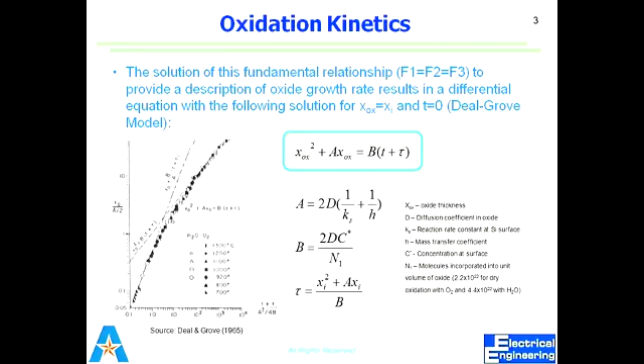So this is linear growth and this is parabolic growth. So it means that Deal-Grove, now you can understand the next two slides. For short oxidation times, now we're talking about this short oxidation, the Deal-Grove relationship reduces to linear form, defined by B over A. This is actually the linear rate constant.

So what will you always be interested in? B and B over A. So this is your linear rate constant, B over A, and this is your parabolic rate constant. So B over A is actually the linear rate constant and B is the parabolic rate constant. So now you have understood why it reduces to linear form.

For short oxidation times, why does Deal-Grove's equation reduce to the linear form? Because we ignore X oxide square. X oxide square, being very small, is ignored, so we get this. And B over A is actually the linear rate constant.

And now the second line, the definition of B over A can be further reduced by the assumption that H is, what was H actually? If you remember that first slide, this H is the constant named as mass transfer constant. Ks is actually the reaction rate constant, and this H is actually the mass transfer coefficient, and reaction rate coefficient Ks.

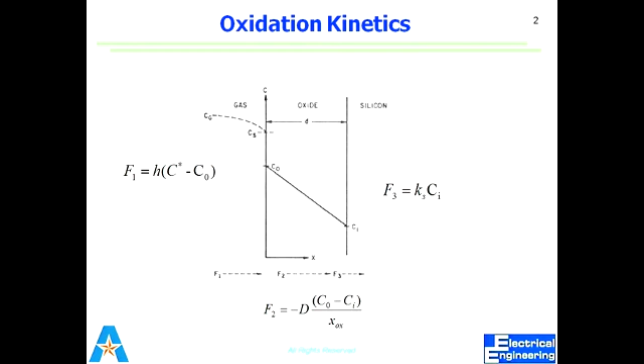Okay, now we were talking about this short time. Anybody who could understand the second line from the discussion? The second line says the definition of B over A, that is the linear rate constant, can be further reduced. Means we can also say that H is very, very large as compared to Ks. Means that the mass transfer coefficient is very high, as compared to all the molecules that get reacted with the silicon.

Yes, now you get to the point, what is the limiting factor here? In this case, as you talked about initially, when there is no oxide, I am talking about the very thin layers. Very thin layer, you can say no oxide. Okay, at the start, it would be a linear increment. The greater the time, the greater the thickness. It would be in the linear region.

Okay, in that case, the mass transfer coefficient means that the gas can be transported from the source to the surface very fast, but the limiting factor is the reaction rate constant. Because there is no resistance to the gas, all the gas is reaching the surface. But the surface has a limited number of silicon molecules; it cannot react with all the gas molecules at one time. So Ks means the reaction rate constant is limiting our oxidation rate. So this process would be called a reaction rate limited process.

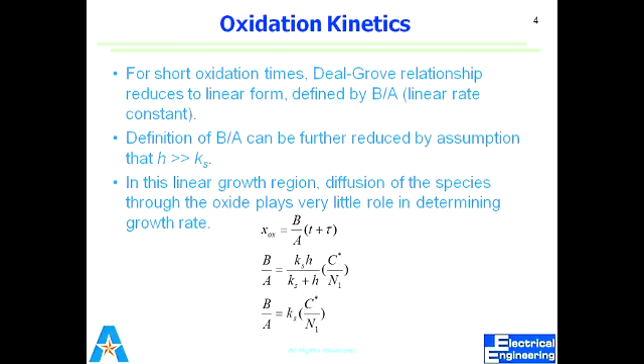Okay, so we have completed the linear region. That is for thin oxide layers. We say this is the linear region, because in this region the oxide growth is linear, and in this case the problem is with the reaction rate constant. Now what happens in case of long oxidation, means thick layers? Everything should be the opposite of that.

Thick layer means, if I draw the graph, it was linear and then it became parabolic. So we were talking about this part. This part has been discussed. Now we have entered this region, means thick layer. Now the oxide thickness has increased much. So for a thick layer, means for long oxidation times, Deal-Grove's equation becomes parabolic growth. This B is named the parabolic rate constant. B over A is the linear rate constant and B is the parabolic rate constant.

Okay, so I would like to mention one thing, that B over A is the linear rate constant. Because what happens is that in exams you have B and A. In a table you are always given B and A and you are told, okay, find out what would be the thickness.

So what we do, we know B is actually the parabolic rate constant. We take B, the value from the table, and A is not the linear rate constant. B over A is the linear rate constant. So you have B, you have A, you will have to divide those two values to get your linear rate constant. Don't use that A directly to find out your thickness. So A is not the linear rate constant, B over A is the linear rate constant, B is actually the parabolic rate constant.

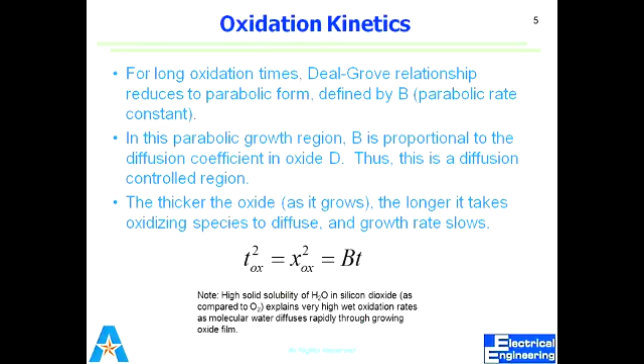Oh, temperature, no. That's why I say that you cannot grow oxide. Since you said 1500, so just for example. No, actually, I was talking about the fused silica. You can grow, I mean, even at room temperature the native oxide grows, but that is very thin. What you can grow at 1000, you cannot grow at 200. At 200, whatever the time you take, you cannot grow that much thickness. So that's why I say it depends upon the process conditions. All these parameters we will see in the next slide.

Okay, in order to find out these parameters, B or A, it actually follows the Arrhenius relationship, that is B is equal to B naught e raised to power minus EA over KT. T is the temperature, K is the Boltzmann constant, that value is fixed. EA is the activation energy, and B naught would also be given at some specific temperature, and similarly EA activation energy should be given. So activation energy at different temperature and at different orientation, depending upon you are using 111 or 100, would be different.

So when you know EA, activation energy would be given in the table, B naught would be given to you. If you want to find out what is my B or the reaction rate at specific temperature, you put that T value and you find out B. But usually we always get that from the table. But if you want to find out the value from the given data, then this is the equation that you need to use: B naught e raised to minus EA over KT. You just put the value of the temperature. The rest of the parameters would be given to you.

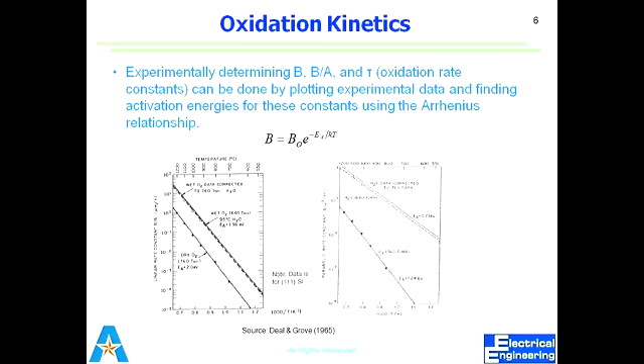Wet oxidation gives you a faster reaction rate. You can grow a thick layer of oxide in little time, but the quality of the oxide would not be as good as we can get with dry oxidation. So there is a trade-off. With wet oxidation, a thick layer can be grown, but not that good quality. With dry oxidation, you cannot grow a thick layer, but the quality of the oxide would be really good.

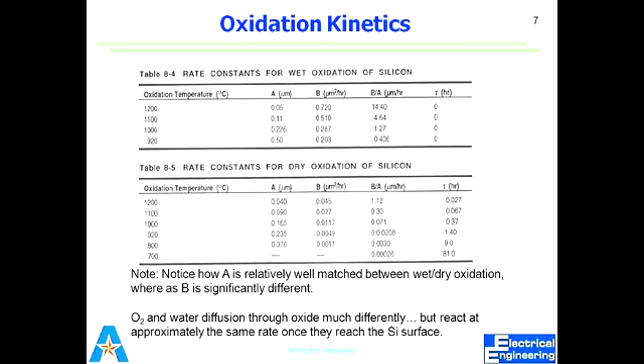So that's why if we have a thick layer, oxygen molecules cannot diffuse through, because in case of a thick oxide layer, it's always a diffusion-controlled process. Diffusion is the problem in case of a thick oxide layer. Water molecules have a different diffusion as compared to oxygen molecules, so water molecules can diffuse easily, and the solid solubility of water molecules is also high. So the problem is actually with the diffusion. That's why wet oxidation is better in terms of growth rate as compared to dry oxidation.

Okay, now we have discussed most of these growth rate factors because questions were coming from your side, so I was forced to explain those. That's why we have discussed most of these: what are the factors by which the oxide growth rate would be limited.

What are the factors? First thing, crystal orientation. As we have talked before, it depends upon the crystal orientation. If we have the 111 plane, it would have more growth rate, reaction rate, as compared to the 100 plane. Anybody who can answer why 111 should have a higher reaction rate as compared to 100? Silicon concentration. Very good. That is the concentration of the atoms. In 111 we have more atoms of silicon as compared to 100. So the greater the number of atoms, the greater the availability of silicon atoms for the reaction. So the growth rate is proportional to the number of silicon bonds per unit area available. That's why 111 is greater than 100.

And I think you can now understand why B over A was the linear rate constant, and B is the parabolic rate constant. The parabolic rate constant is not affected by the crystal orientation, but the linear rate constant strongly depends upon it. Why is it so? Because at that time the reaction rate is the limiting factor. When I say the parabolic rate constant, I am talking about the thick oxide layer. In a thick oxide layer, the problem is with the diffusion. There is no problem whether it is 100 or 111. We have enough molecules for the reaction.

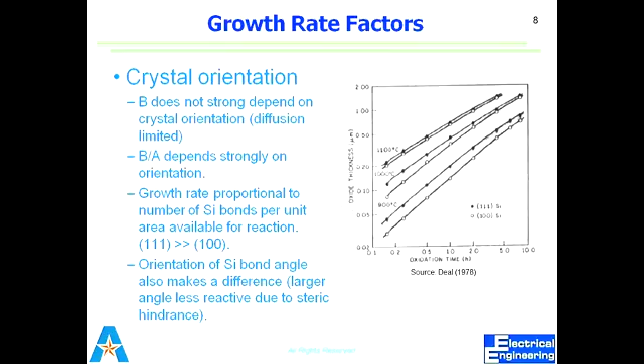The second factor is the dopant. When we have a dopant, whether it is boron or phosphorus or any other, the reaction rate increases. Why is it so? Do you know about bridging and non-bridging oxygen in silicon dioxide? In simple words, I would say it's because they are impurities. A dopant is also an impurity. Due to the impurity, the crystal structure is not as strong as it was with no impurity. When it's weak, it lets the oxidant get in, so the diffusion becomes easy. That's in simple words.

To be more specific, if this is a silicon, it is surrounded by oxygen, and similarly it goes on. This oxygen that is shared by two silicon dioxide molecules is named the bridging oxygen, because it bridges one molecule with the other. And if I talk about this oxygen, if it is not shared with some other silicon dioxide molecule, the oxygen that is not the bridge is named a non-bridging oxygen. This is a non-bridging oxygen, and this is a bridging oxygen.

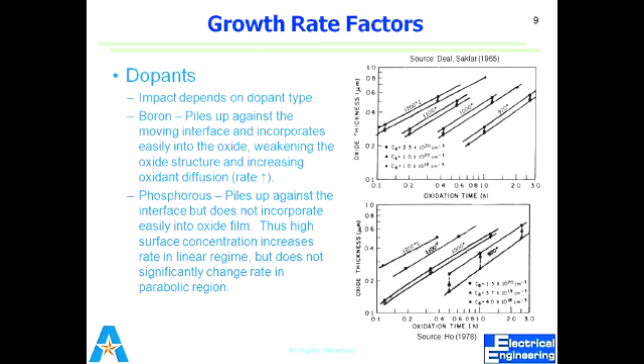Okay, pressure, this is also one of the factors. So if I increase the pressure, here is where F1 actually comes into play. If I want to grow the oxide at low pressure, I can do it. So I decrease the pressure, but it will decrease the rate as well. And similarly, if I increase the pressure, it will increase the oxidation rate as well.

I believe I don't need to explain why the pressure will increase it, because high pressure means it will forcefully push all the oxygen molecules to reach the wafer surface. So it means F1 is faster. It will forcefully try to push it through the diffusion, so it's trying to speed up the process. So higher the pressure, higher would be the reaction rate.

And typically, when you need a thick oxide layer, you go for high pressure oxidation. In case of high pressure, you get the thicker layer in less time, meaning you have a high reaction rate, high growth rate, but the quality would not be that good. So it's always a trade-off.

Mostly in the growth of oxide, the greater the growth rate, the worse would be the quality of the oxide. Generally speaking, there may be some exceptions, but generally speaking, like pressure or temperature or anything else, lower the rate, better would be the quality.

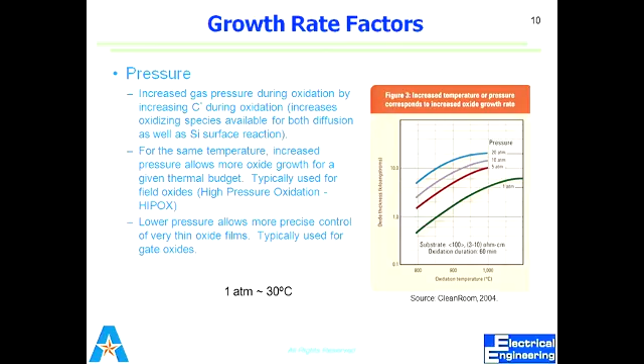Okay, so after pressure, there is an effect of chlorine. Now, if we introduce chlorine, this is also an impurity. So if we introduce the impurity inside our furnace, what do you think? The quality would be better or worse? Can you repeat the question? Chlorine. What would be the effect of chlorine?

Okay, so you are reading the slide. So chlorine would actually improve the quality of the oxide because it reacts with the metallic impurities. If we have sodium ions, or potassium ions, or maybe iron or anything, it will react with that, and after the reaction it becomes a byproduct that is ventilated out of the furnace. So chlorine is a very useful impurity that is introduced to improve the quality.

And if we look at this table, you can see that there are different chlorine precursors or sources that can be used or have been used. But some of those have their drawbacks. That's why we cannot use them. So I'll talk briefly.

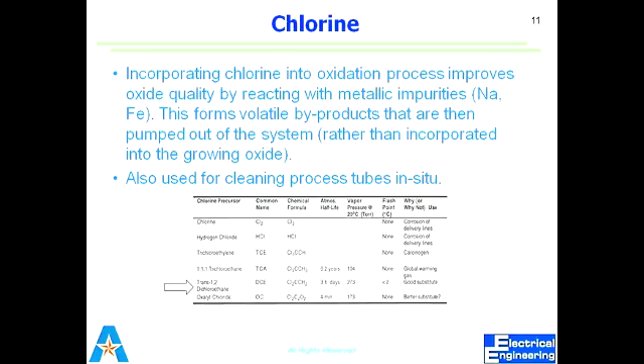One more thing about the Deal-Grove method: I told you that if you draw it, initially it has a linear region, after that it has a parabolic region. This experiment we will do in the lab as well. The first experiment is the oxidation, and you will see initially it grows very fast, and later on it tries to get bent and tries to get constant at some value. Okay, so it gets into the parabolic region.

So you have seen that I have not started from zero. I have started from here. That means for very thin layers, less than 30 nanometers or 300 angstroms, it does not give you the right answers. If you use the Deal-Grove model, it's very effective and in use, but not for very thin layers. At very thin layers, maybe less than 30 nanometers, the Deal-Grove method will give you less oxide thickness, but experimentally you will find a thicker layer compared to what the Deal-Grove equation is giving you.

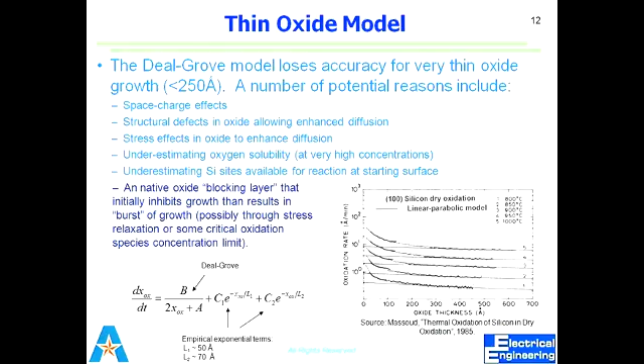So the Deal-Grove method does not work well for less than 250 or 300 angstroms. For the initial 300 angstroms, it does not work well. The reasons can be that we are underestimating the oxygen solubility, or there may be more silicon available, and stress effects and space charge effects are also there. So there are certain reasons that the Deal-Grove method does not include properly. But it's only for the first 300 angstroms. After 300 angstroms, the Deal-Grove equation gives you very reliable data.

Okay, so now we talk about the silicon dioxide interface. As I told you initially, today we are talking about the thermal growth of the oxide layer. Silicon dioxide can be deposited as well, but we are not talking about that today. Thermal growth means that we need a silicon surface. So this is a silicon substrate. With the silicon substrate, we can grow silicon dioxide in the presence of high temperature and oxygen, or high temperature and water molecules. If it is only oxygen, we say dry oxidation. If it is water molecules or steam, we say wet oxidation. What we will be doing experimentally in the lab is dry oxidation.

Okay, so if this is silicon, and after that let's suppose I have 500 nanometers of silicon dioxide. Do you think it should be like this? Should the silicon surface still be the same, or should it change? Amorphous? No, I'm talking about just the surface layer. If this is the silicon surface and I grow oxide, should the silicon surface stay at the same level, or actually go down? It will go down. Why should it go down? A portion of silicon will be consumed.

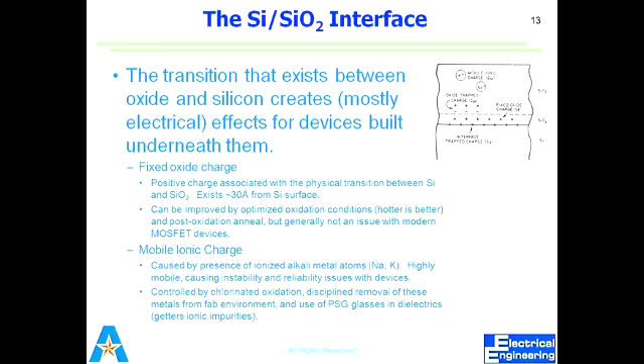The third one is oxide trap charge and interface trap charge. I talked about interface trap charge. Yes, mobile ionic charges are above the silicon surface, as you can see there, and they are mobile as well, and can have positive or negative polarity. And the last one is the oxide trap charge, which also depends upon the temperature. The higher the temperature, the fewer the defects. Means inversely proportional.

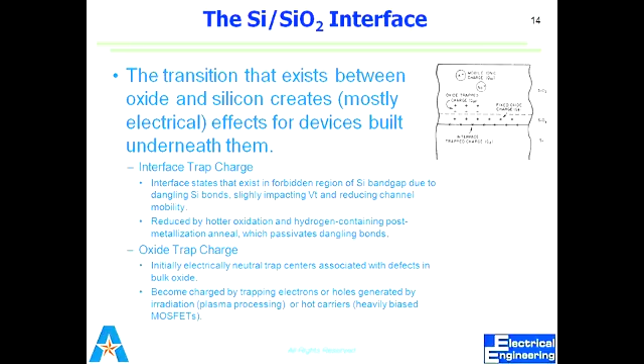So, as I told you, these are 4 types of defects that usually come at the interface of silicon dioxide. Not very important, but you should know about them. Next we'll talk about stress, why the stress is there, and the 2 different types of stress at the interface of silicon and silicon dioxide. But the time is up, so we'll discuss it next time.